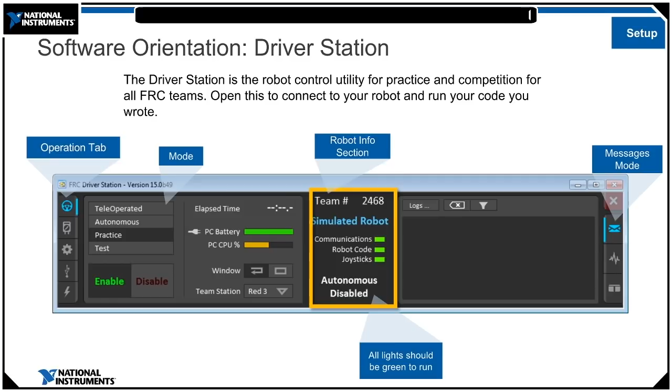All three of those lights need to be green in order to run your robot. If you're an experienced team, I'm sure you've had times when one of those lights wasn't green on the field. You know how frustrating that can be. So making sure all of that works in practice is really, really good.

On the right-hand side, you can tab to messages mode. This is where any errors or things you've programmed for your roboRIO to feed back to the driver station will show up.

Going on to the next tab is what we call our diagnostics tab. This shows what parts of the communication system are working or not working. You can see we have 5 different radio lights underneath the communications header, and each one of those lights also needs to be lit up.

You can also use this to reboot your roboRIO or restart your robot code without walking over to your robot. And here we have an example of some error messages that might come back from your robot while you're running it. So April, what do some of those error messages mean exactly? What are some common ones that somebody might see?

A really common one will say that a server's not running and that you should check your firewalls. That's how you know that your Windows firewalls are interfering with the communication for the robot. So if you're seeing something like the MDNS server can't start, go check your firewalls. That's a really common one.

Or if you're running a loop, a lot of times it'll say that something is out of memory or a loop is running too fast. And that can be an indication that you have an untimed while loop somewhere.

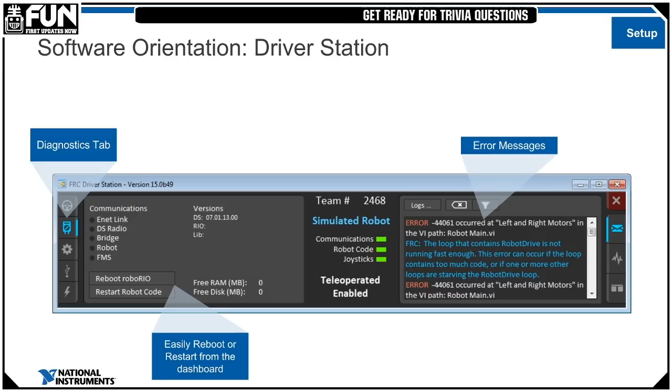Moving down one more tab on the driver station, here's the setup tab. This is where you go to type in your team number when you're trying to talk to your robot. You can also use this to configure match settings.

So if, for example, something crazy happens and we have a minute of autonomous next year, you can go set that up for a minute of autonomous here. We've configured it with default match settings, but you can change those at any time.

If you move down a tab on the right-hand side of the driver station, this is chart mode. This shows all the information we're getting back from the roboRIO by default: your battery voltage, your packet loss percentage, what percent of your CPU you're using. So if you're not getting communications, looking at the chart tab can be really helpful in figuring out why.

Going down one more tab on the driver station, we have our USB devices. This is where you can see any controllers plugged into your computer, see all of those live joystick inputs to figure out what the A button actually is. You can also combine messages in chart mode, though it can get really hard to read pretty quickly.

The very last tab on our driver station is the power and CAN tab. This is where you can go to see if your power light on your roboRIO is red. Go to this tab after plugging it into your driver station or your computer, and it'll tell you what rail on the roboRIO is shorted, which is pretty neat. You can use the user manual to determine what voltage corresponds to which rail. So for example, if it says you have a fault on your 5-volt rail, we know that's probably the DIO on the roboRIO.

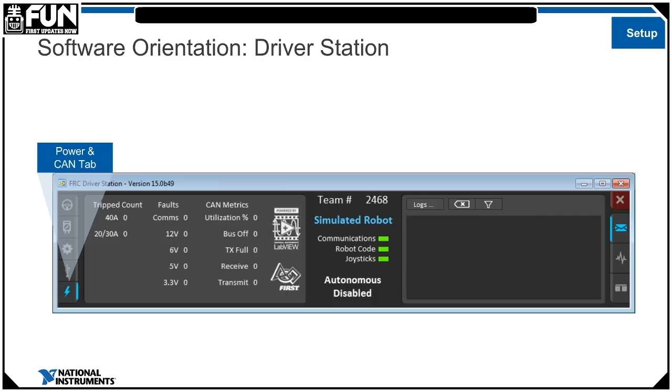April, I got to ask, there's quite a few people in chat talking about something about a 60-second autonomous listed in there. Is that a leak for the 2018 game? It was a total random number I came up with. Total random. So when it comes out this year, we're going to know how badly you lied to us. If it comes out to be 60 seconds, I think some people at FIRST would be very mad at me for ruining their surprise. I promise I'm not involved with that in any capacity.

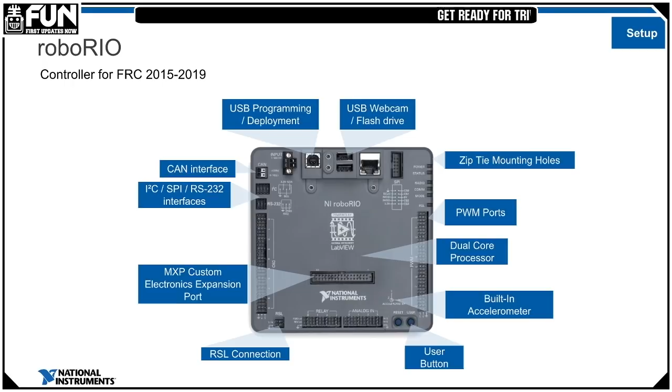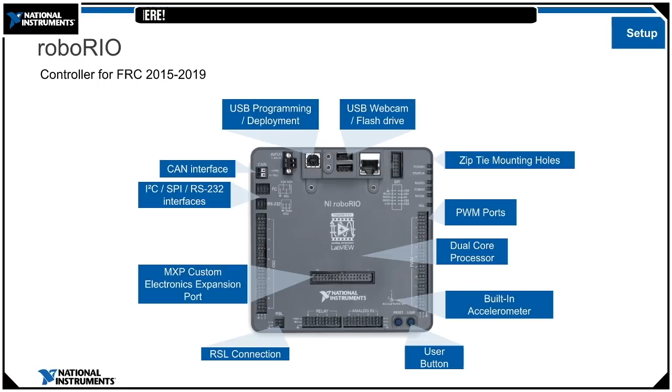Moving on from the driver station, this should be something you guys are all pretty familiar with. This is your roboRIO. We've highlighted all of the inputs and outputs we have on this thing. Typically you want to use that USB port for programming and deployment, and definitely for imaging—it's the most stable connection you can get from the roboRIO. You can use the other USB ports to connect to that all-important webcam on your robot, and the Ethernet port should be connected to your radio anytime your robot is on the field. The roboRIO actually has 4 zip tie mounting holes around the outside, so you don't need to drill into it—you can just zip tie it to whatever you want. Then we have our PWM ports, the accelerometer, our RSL port, and that MXP custom electronics expansion port in the middle. So if you want to design your own boards or work with a third-party partner board, those go there. And then all of our I2C, SPI, RS-232, and CAN interfaces.

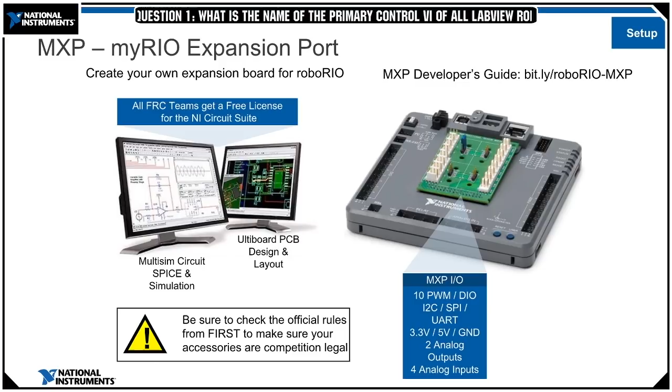Moving on, talking about that MXP, the myRIO expansion port, we actually have a developer's guide for the MXP port. So if you're really feeling it and want to design your own board, you're absolutely welcome to do that—be sure to check the official rules from FIRST to be sure that any accessories you design or use are competition legal. Looking at some of the other MXP accessories, we do provide some prototyping boards and breadboard type accessories. And some of our third-party partners, which you can get at AndyMark, do make boards that fit in the MXP slot.

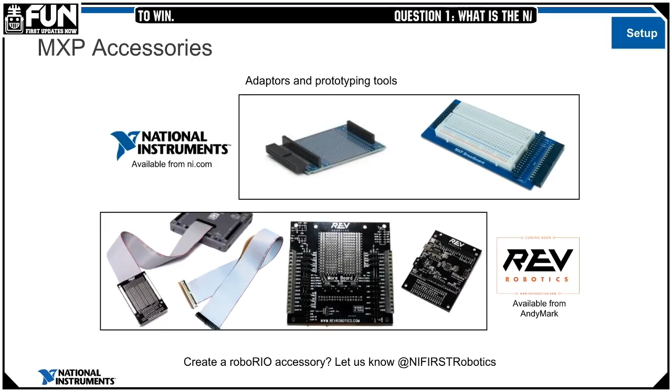So if you don't feel like designing your own board and you want to use something that is likely competition legal, go check them out.

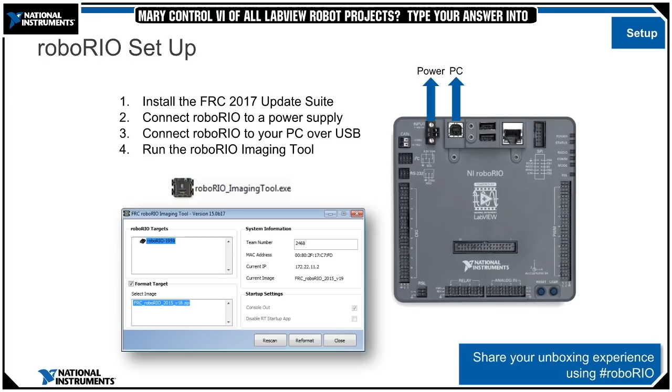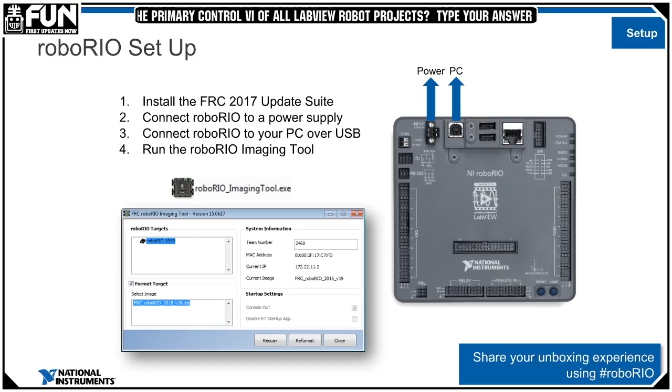Let's look at setting up our roboRIO. This is a pretty quick and easy 4-step process to get it ready to run LabVIEW code. First, install the update suite to get the most up-to-date image. Connect your roboRIO to a power supply—they are not USB powered, so they need that external 12-volt supply. Connect your roboRIO to your PC over USB, then open and run the roboRIO imaging tool. Make sure you put the team number you want to use in there, because that needs to correspond with whatever team number you give the driver station, since that's how they talk to each other.

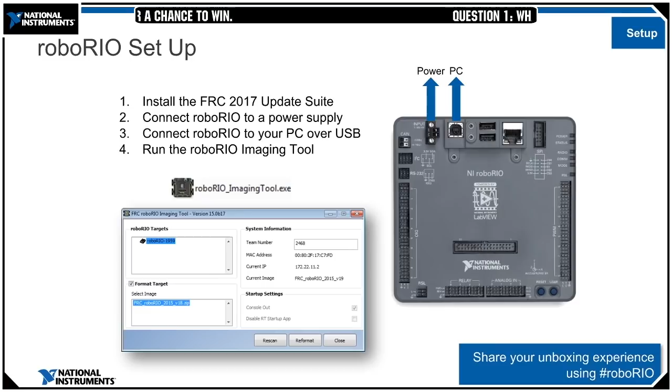So let's look at how we go from opening LabVIEW to driving a robot in 5 quick and easy steps. Step 1: you should be able to do this in simulation if you're following along, but if you're using real hardware, you need to properly set up the roboRIO controller and all your other electronics on your robot first. So step 1 is open LabVIEW. Then from that Getting Started window, you can either go to New and FRC roboRIO project, or just click on the FRC roboRIO project link on the front page. This opens your default roboRIO project.

So April, something really important in any file structuring program is coming up with a really good way to save files and file numbering and naming. Do you have any suggestions for making it easy to keep track of what you're on? Yeah, I highly recommend giving it a descriptive name. So if you know you want to use this project to develop, say, encoders on your robot, call it robot encoders or 2017 robot encoders. Then as you save it, you can add more details or put notes right in your VI. You can double click anywhere in any VI in LabVIEW and it'll make a note for you. So you can put a lot of notes saying, hey, this is what I'm doing in this VI. That's a great way to provide information without cluttering up your file names.

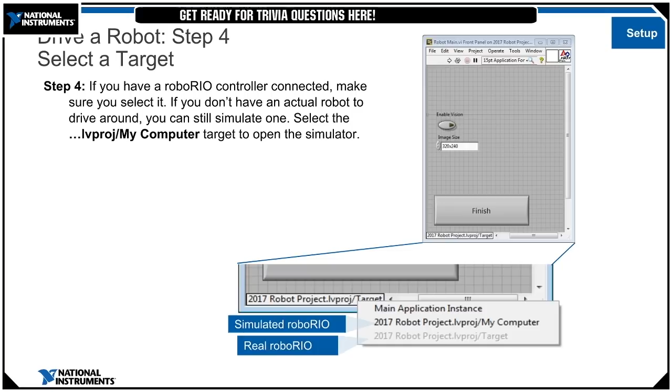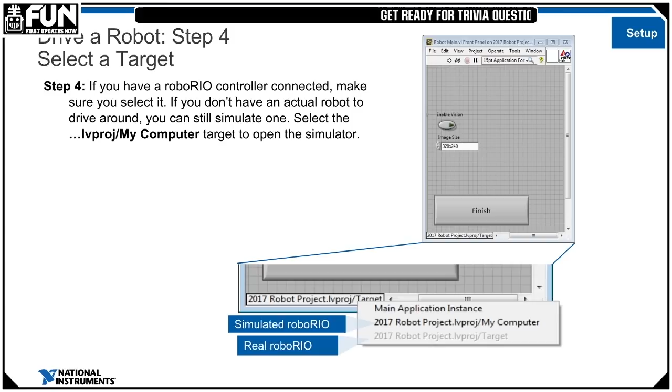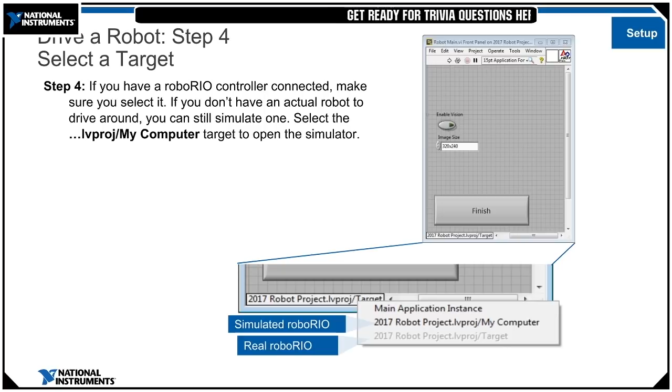So once we've opened up Robot Main, we can go ahead and select our target, which is step 4 of this process. When you're looking at Robot Main, you'll see that little yellow text box in the lower left-hand corner of the screen—that's actually the target we're going to deploy this to. By default, it's going to be looking for a roboRIO to deploy to. We can click on that and change the target to point at your computer. When you point it back at your computer, it'll automatically open up our robot simulation window and go through a little opening process to open up all the supporting files, but you'll be able to test any drive code in simulation without needing an actual robot.

Once you've toggled that over to a simulated roboRIO, which I'm doing in my case because I don't have a robot at my desk, we can move on to step 5, which is to click that white run arrow at the top left-hand corner of Robot Main. This is actually what's going to send your code to the roboRIO or your simulation, and at that point you should be able to drive your robot given that everything else is hooked up correctly.

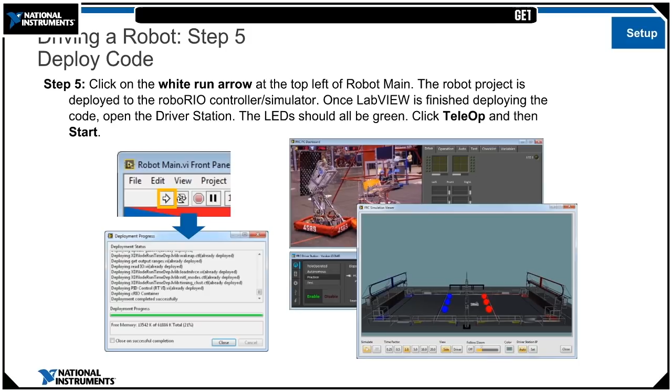Cool, so let's move on to actually looking at LabVIEW. We're going to briefly talk about what LabVIEW is, look at the development environment, go over some programming fundamentals, and then some things that can help you with troubleshooting your robot code.

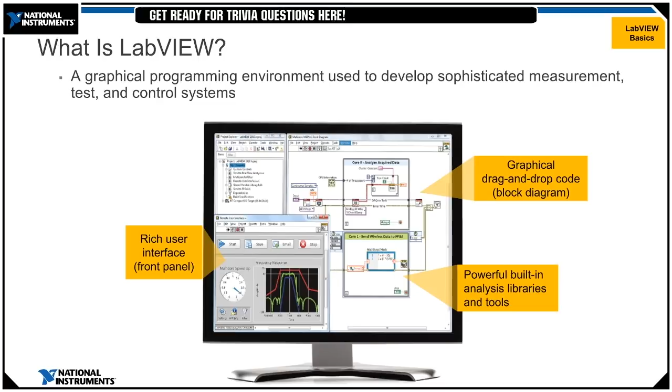So what is LabVIEW? I keep saying this. LabVIEW is a graphical programming environment. It's not actually a programming language — the language it's written in is G, and LabVIEW is just a programming environment, just like Eclipse or anything like that. We use it to develop sophisticated measurement, test, and control systems. So we have this graphical drag and drop code style that's a lot easier for most engineers to pick up than traditional text-based languages.

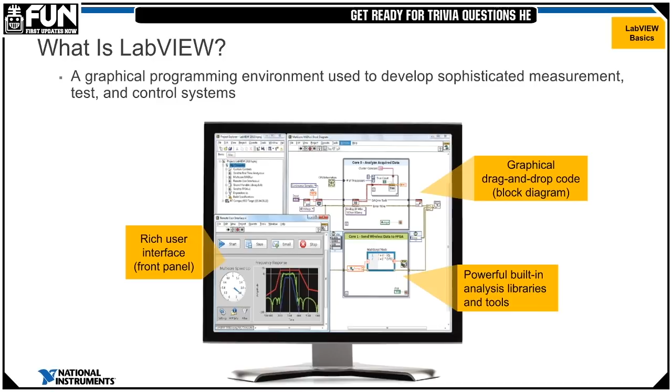Really what we care about in FIRST is that supercritical Teleop and autonomous code. When we look at our Teleop code, it sort of lives in 3 places. We're going to want to initialize in the begin VI — this is where we set up our joysticks, our motors, anything we want to refer to later, and we set up their references in begin. We then use those references in Teleop to actually access those devices, and then we close those references out in finish to release them to be used by the next program.

When you're modifying that FRC robot project template, do not modify robot main. You don't really need to, and putting stuff there can really slow down that main communication loop that we definitely want to keep as fast as possible.

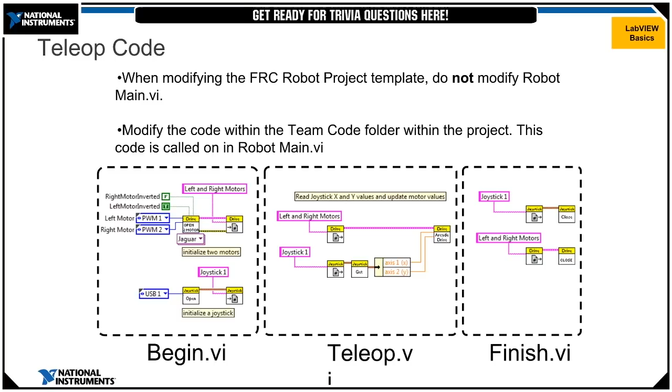So looking at our robot main.vi, because you definitely want to have an understanding of how this works — in our main Project Explorer, again, we have that Project Explorer window, which lists all your files. We have our front panel here, which is going to be the window with the gray grid on it by default. You can toggle the grid off if you don't like it; I like it because it helps me tell the 2 windows apart. This is going to be kind of your user interface — this is where you're going to have any buttons, any inputs, things like that living on the front panel.

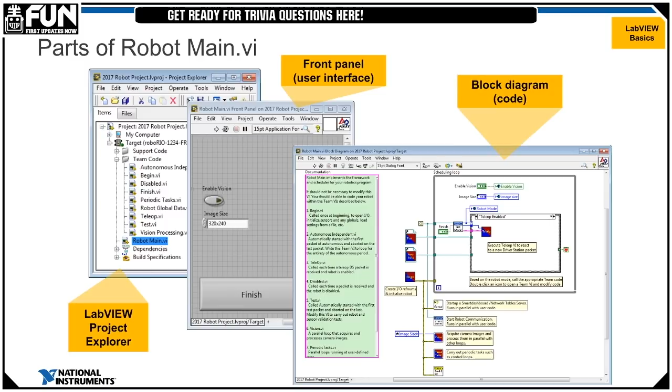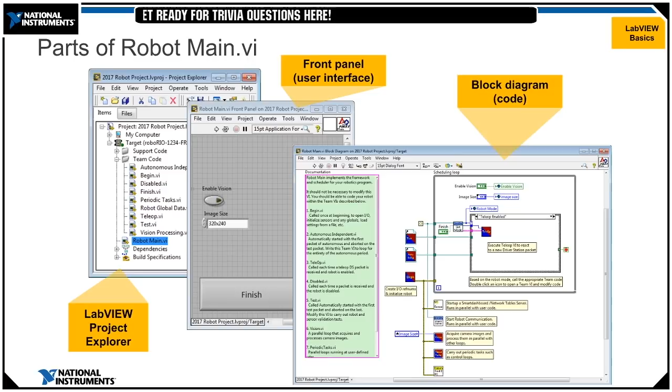And then the window with the white background, you can open this up by pressing that Control-E shortcut — we're going to view block diagram. This is where your actual code lives. This is where you can see, oh, I have some loops here, I have some sub-VIs, I have some notes — this is where things are actually happening. You can kind of think of LabVIEW as an old analog radio: you have some buttons, some dials, some screens on the front panel, and then all your wiring is actually going to be on your block diagram.

Looking at that LabVIEW Project Explorer window, we have a couple of standard LabVIEW file extensions. Your project files are going to have a .lvproj extension. This is going to own all of your VIs, but the neat thing is that a VI can be owned by multiple projects. So a VI is a virtual instrument - it's what we call that combination of a front panel and a block diagram, so it can be called by multiple projects at the same time, which is pretty cool.

You can also make custom controls. So if you want a really specific dial or something like that, you can develop that and then use it, and it's going to have a .ctl extension.

The other cool thing about the Project Explorer window is you can actually test your connection to a roboRIO right from this window. You'll see where it says target, and it should say roboRIO-your team number-frc.local. In this case, we're team 1234, because that's very original - the most creative team name ever. I'm running out of numbers. I used to use 9999, but we're getting up there in FRC teams, and that's going to be someone's team number soon. You can right-click on that target and select Connect to Target.

If it connects successfully, it'll say Connection Established, and that little button next to the roboRIO will turn bright green. So it's a really quick and easy way to test that you have a connection before you start trying to deploy code.

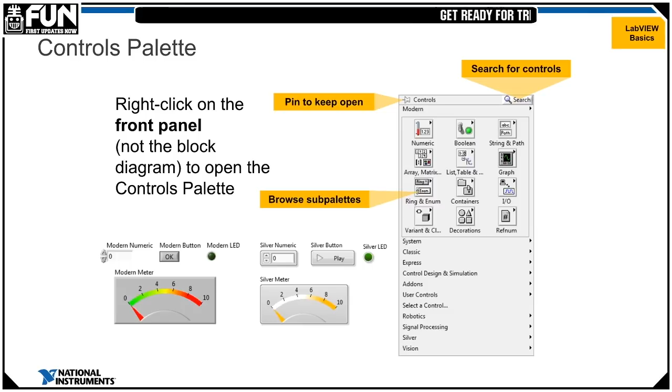Hey April, I wanted to ask - we have a few questions coming up, but there's one that was specific to a slide you were just on. Rich4327 asked, what is the advantage of the front panel for those in FRC? Like, what advantage can they get out of using that?

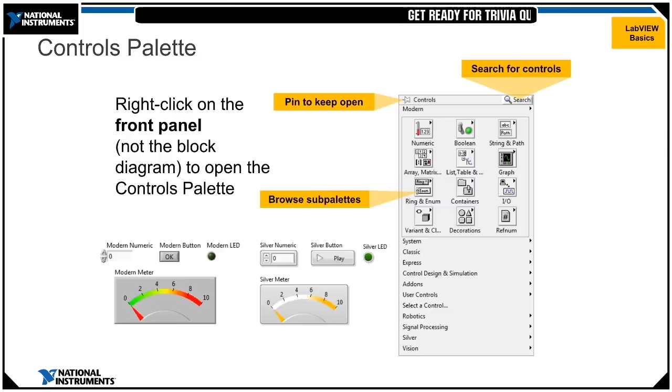Front panels are great, like I said, for that live testing. I can be connected to my robot over Wi-Fi in my shop, driving it around, and I could be returning the image I'm getting from the camera. And if I'm doing any sort of vision analysis on that, I could see how many rectangles I'm creating, for example, or what values it thinks are coming back from the camera, if it's identifying something as light or dark. And I can see that all in real time, but I can also adjust that in real time.

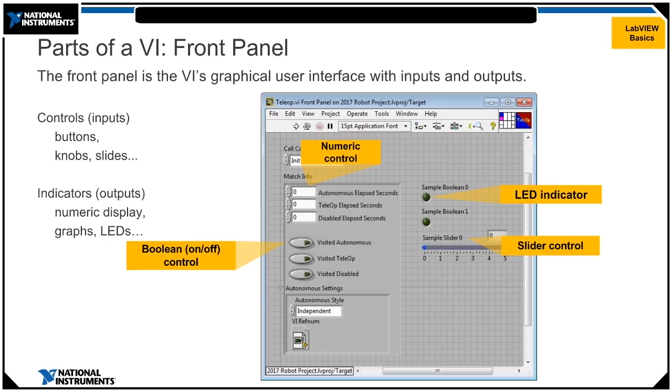So I can set up some controls that correspond to what my light threshold should be, if we're continuing with that vision example. And if I say, oh, okay, 5 is too low, let me bump it to 7. Oh, that's too high, let me bring it down to 6. I can do all of that really, really quick. So it really speeds up any sort of code iteration once you have the basic structure in place.

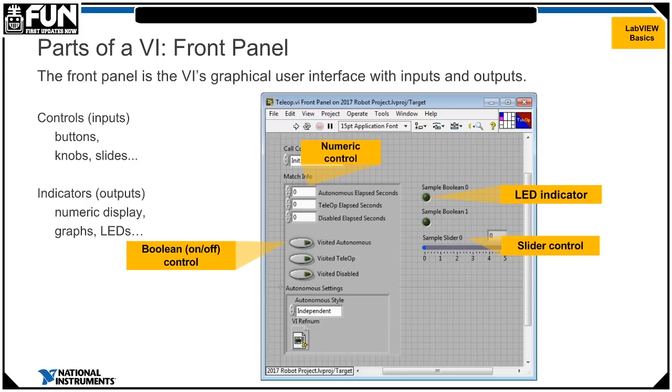So let's move on to parts of the VI, looking at the block diagram. Like I said before, the block diagram is the code for LabVIEW. That's where your actual code lives. Those graphical blocks are connected with wires to control execution, and those wires help enforce data flow, which we'll talk more about in a bit.

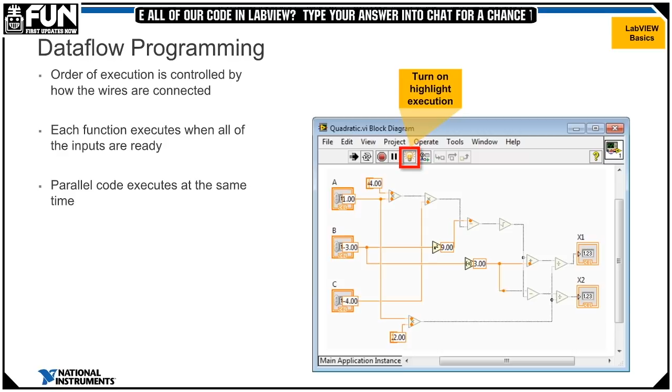If we look at this example here, you can see that the multiplier by 2 on the very bottom of this window wouldn't execute until it got the value down from A. A really good way to find out what order things execute in is to click on this little light bulb and turn on what we call highlight execution. It will slow down all of your code so you can see things happen in real time - those little dots, which kind of look like Pac-Man to me, will run along the wires as things happen, so you can see what order your code executes in.

It's a really good way to make sure your code is executing in the order you think it is, you're transitioning between states in a state machine correctly, your logic is right, things like that. But one thing to keep in mind with highlight execution is it slows everything down. So if you're running robot code on your roboRIO and you turn on highlight execution, you're immediately going to get an error that says your main control loop is running too slow and we can't maintain communication. So this is mostly used when you're developing code to test logic, test execution, and order of operations, but you don't really want to use it on your robot.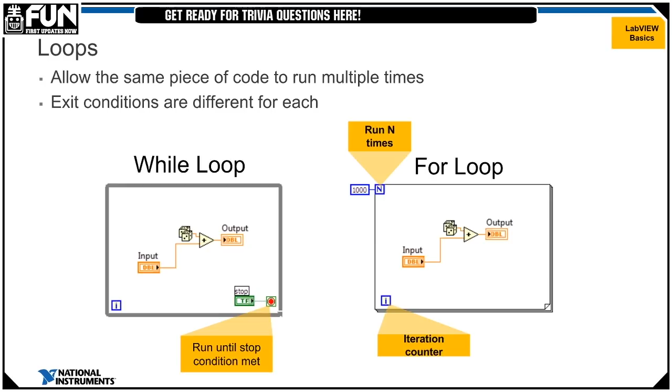A for loop, on the other hand, runs a set number of times. You can wire an integer to what we call the N terminal, and it will run that number of times—in this case, we wired 1,000, so this for loop would execute 1,000 times. You can also use the iteration counter, that little 'i' square in the lower left-hand corner, to use the number of times it's run in some logic to only execute it so many times. So you can say, hey, if this value is greater than 15, stop my loop. That's a neat way to do some logic in there as well.

So I talked briefly about sub-VIs earlier. Sub-VIs are going to appear as those little squares on your LabVIEW block diagram. These are basically functions, and they're just going to have more code inside of them. In this case—and this is the example we'll be walking through here in a little bit—we decided...

We wanted to scale our joysticks down when we get the input, because 0 to 1 was way too much on our wheels, for example, and we were browning out, so we wanted to scale it down by 2% or whatever. So we made this compact little sub-VI. Sub-VIs help keep your code really neat and clean, and can help it stay very readable even if you have a lot of complicated logic going on. The neat thing about sub-VIs is they have a connector pane, so you can pick and choose where you want to wire inputs and get outputs from your sub-VI.

And we'll look more at that when we do our live example, which I think we'll jump into now, Tyler.

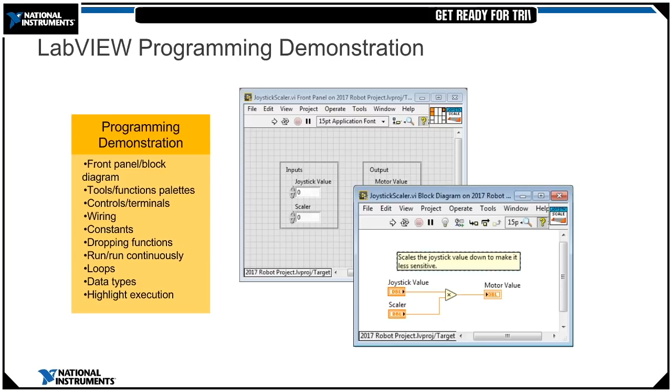Alrighty, so we can jump into a live example here that you're going to be showing. What are you going to be showing in particular? We are actually going to go ahead and make this joystick scaler sub-VI and show you how you make a sub-VI, and then how you just write some simple code in LabVIEW as well. All right, we are good to go. All right, awesome. So you guys should be able to see my LabVIEW project here.

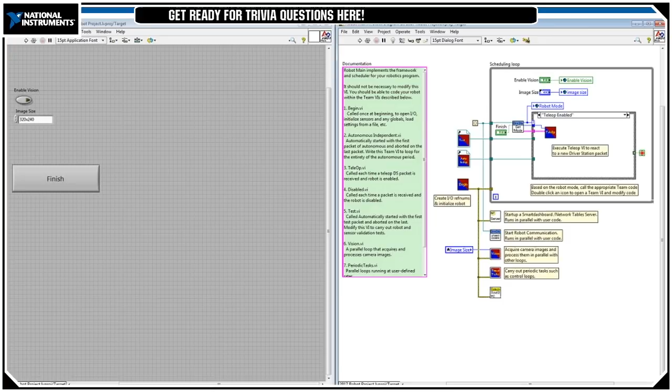I just have a default robot project. Note mine is still called 2017 Robot Project. That's how you know it's not important. But we're looking at robot main.

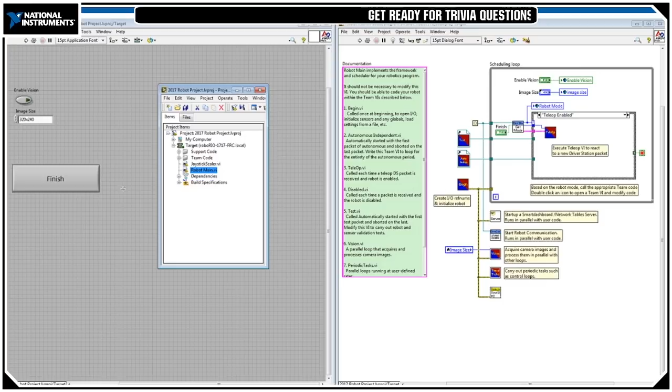So over here we have our front panel. Over here we have our block diagram. Now I want to go and scale my joysticks, right?

So we're getting that information in our Teleop sub-VI, which is right here on the screen. In order to open up the sub-VI, I'm going to double click on it, and it's going to open up over here. You see that we have another front panel, and then I can either press Control E, which is the shortcut, or navigate to View. Should be under View.

Shows you how often I use it. Maybe it's under Window. There you go. Window Show Block Diagram. I pretty much exclusively use the shortcut.

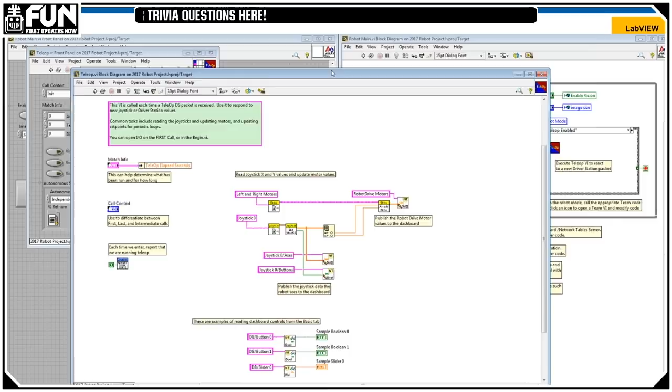And this is the block diagram that I have for Teleop. So over here, you can see that we're getting our refnum for our joystick, we're getting the values, reading these off the array, and publishing this to the arcade drive, which then gets sent to our motors.

So this value right here is coming directly off the joystick and going to our motor. This can be really problematic sometimes because if you ramp your motors up too quickly, you can cause brownouts by pulling too much amperage out of your battery. And this can actually cause your robot to lose connection and need to restart in the middle of a match, which is super inconvenient. So in order to avoid this, we're going to scale our joystick down a little.

So I want to go make a new sub-VI. I'm just going to go to File, New VI, and we'll make these windows big. Cool. So I have a blank front panel and a blank block diagram.

I know that I want to have two inputs, right? I want to get the initial value from my joystick. So we'll go ahead and just make a numeric control for that, and we'll call this joystick value. You can see that the name updated on the front panel and on the block diagram.

And then I also want an input for how much I'm going to scale it by, right? So again, I'll right click on my front panel, click here, go to numeric control, and get another one, and we'll call this our scalar. So you can see we have two things here.

Now if I want to be a good programmer and put notes in my code, I can just double click and say, hey, these are the inputs. So now if anyone else opens this up, they know that these are values we're expected to provide.

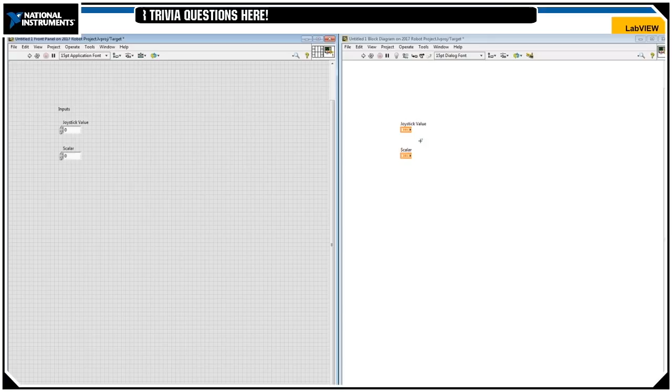So great. So now I just want to scale it, right? All I want to do is multiply our joystick value by our scalar. So I can right click over here, navigate to numeric, and then select multiply.

If I didn't know where that was, I can also right click, click on search, and then type in I want to multiply something. And it'll say, oh look, right here, multiply. And I can just double click on this, and it shows me where it is in the palette so that I can find it next time.

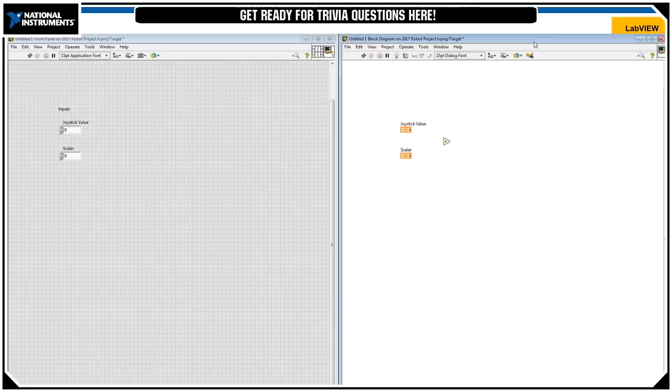So I'll click and drag and drop that over here. I don't need my functions palette anymore, so I'll close that out. In order to send these values to our multiplication, I'm just going to click on the wire terminal on my scalar, and then click on the input terminal over here.

You'll see LabVIEW does some sort of automatic routing of your wires, so they're not just squiggly and all over the place. But if I wanted to clean that up, I can click on this cleanup button, and you can see that it does an alright job. I don't really like it, so I'm gonna undo that and put it back to the way I had it.

I'm just going to bring that in because you want your code to stay sort of small and readable. Typically, we program from left to right in LabVIEW, so you can sort of scroll across and read it. You can go top to bottom, you can go right to left. Probably safe to stick with left to right.

And so now I want to get this value out of my multiplication. I can either make an indicator over here and wire it up, or I can actually just right-click on this wire terminal and go to Create Indicator. Boom, it's right there. And then I can go ahead and say this is the value we actually want to send to the joystick, so we'll call this final joystick value.

You can see LabVIEW stuck it up here. I'm going to bring it down, put it by my other ones, and then April asked if there's a way we can zoom in just a little bit on this.

No, you cannot zoom in LabVIEW, actually.

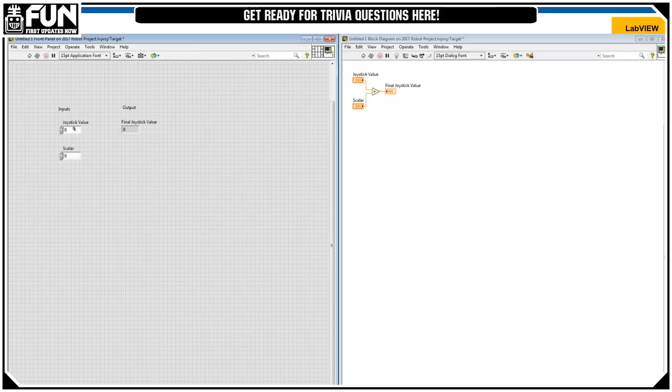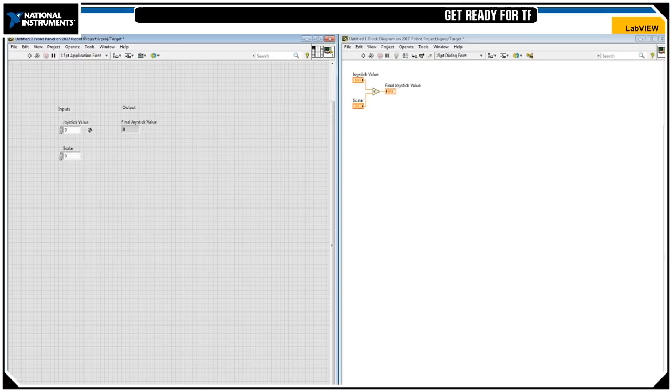So now we've set this up, and this is our sub-VI. We're going to want to connect our inputs to our connector pane so we can access them in our other block diagram in Teleop. I'm just going to select the input, click on the little tiny terminal block up here, and then click on that—you can see this turns orange. Then I'll wire this one a couple spots below it to my scalar, and wire that to my joystick value.

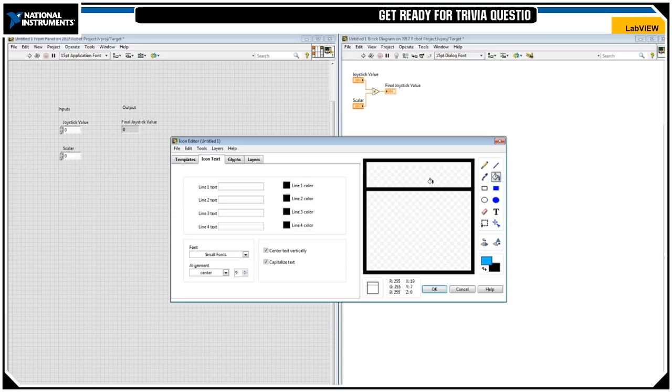The other fun thing about making sub-VIs is you get to make custom icons. So I can click on this, it'll open up the icon editor. I can clear this and just make my own icon. We'll make this blue—I like this color blue—and then we'll put some stuff on it.

We probably want to give this a descriptive name so I know what it is. So we're gonna—oops, I don't want that to be blue, make that black. Probably want to give this a descriptive name so I know what this sub-VI does. Otherwise you'll end up with a lot of sub-VIs that look exactly the same, and your code will be impossible to read, and no one but you will know what's going on.

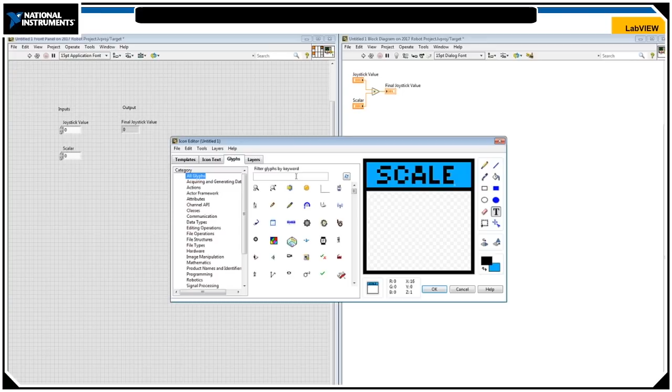And then we have a whole lot of these fun little glyphs, so I'm just going to search scale. What are some of these that look interesting? This looks like kind of what I want to do here—I'm taking a value and making it something else. So when I'm happy with my icon, I can click OK.

And then I definitely want to save my sub-VI before I lose it, so I'll go to File, Save As. It's just going to put this in this temporary folder here that I've created, and we'll call this Scale Joystick Value.

Great, so now we've got this, and now we want to go back to our Teleop VI. We'll make that big, so now we can see our Teleop VI, and I want to put that other VI on here now. If we go to our project window, you'll see it automatically added my VI here because I made that new VI while I had this project open. Otherwise, you could right-click and browse, and add VIs, files, things like that.

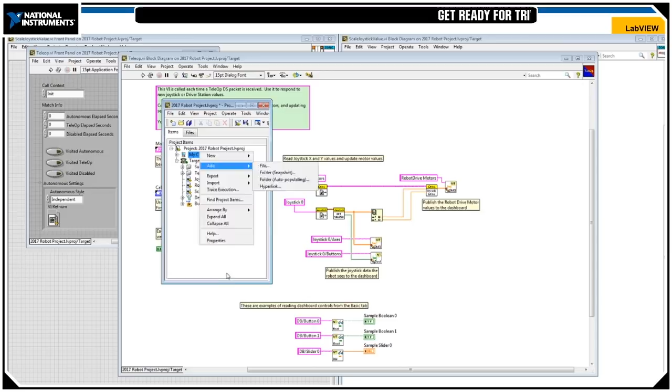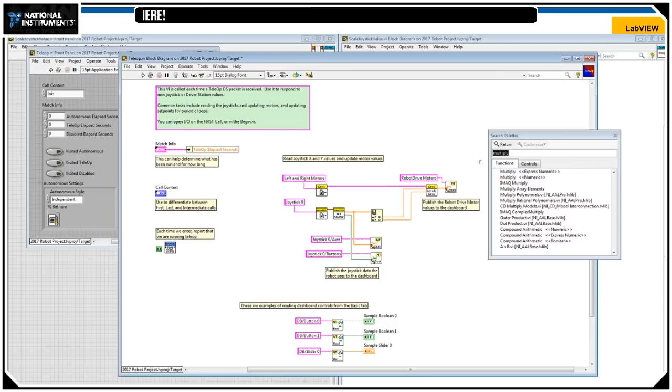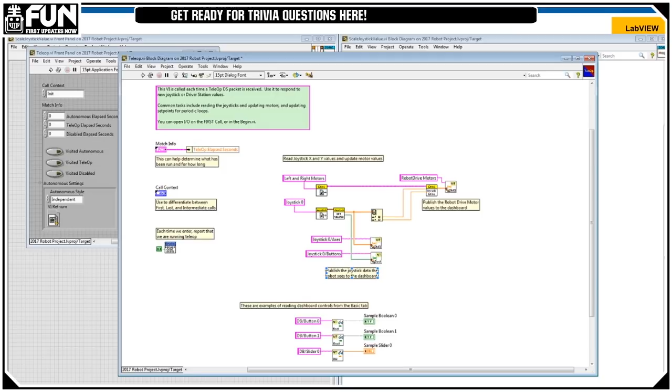So if I want to get to this VI, I can either click and drag here and it'll pop over. I can also now search for—oops, what did I call that? Scale joystick value. Can't type it right, but you can also search for it and find it that way. I usually grab them from the Project Explorer because then I know I'm getting the VI I want. So I'll put that over here.

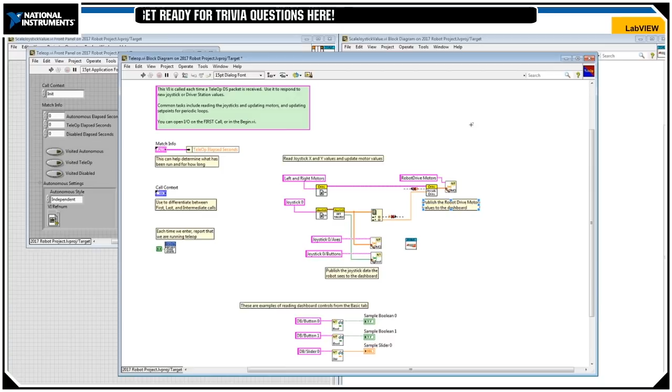I'm going to go ahead and delete this wire. So you can see I have these broken wires here—that's just because that end's not connected to anything. You can clean up broken wires with Control B. So once those are cleaned up, I'll drop that in here.

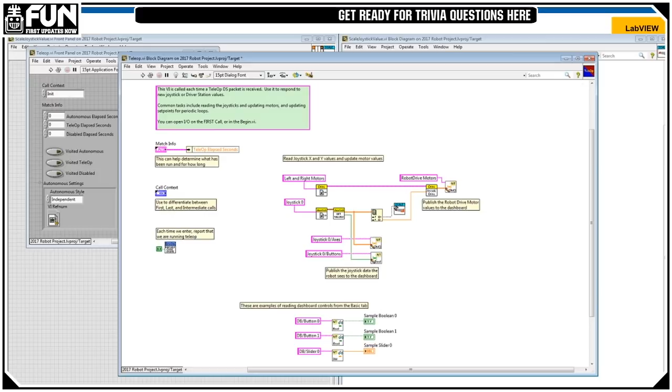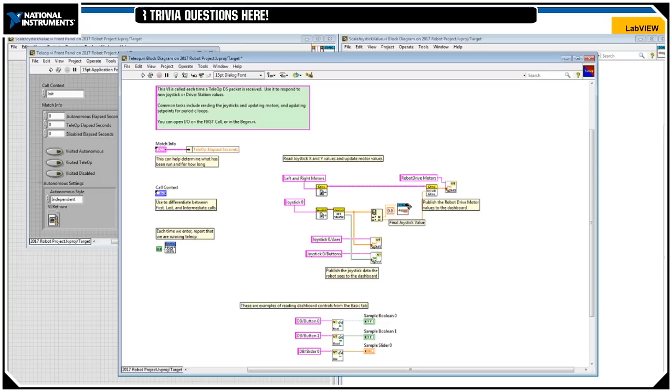This is going to go—you can see if I hover over these terminals, it tells me what I'm connecting it to, so I know, say, that's my joystick value. Then I can clean up the code a little: right-click here and go Create Constant, and we'll give this a multiplier of 0.8, so we turn it down just a little bit, but we're not taking away all of the power. Then we'll wire that final joystick value back to our x-axis. And now we're done—we've scaled our joysticks, we can save our project, and we're good to go.

And that's the end of our live demo. All right, we'll jump back into the other one.

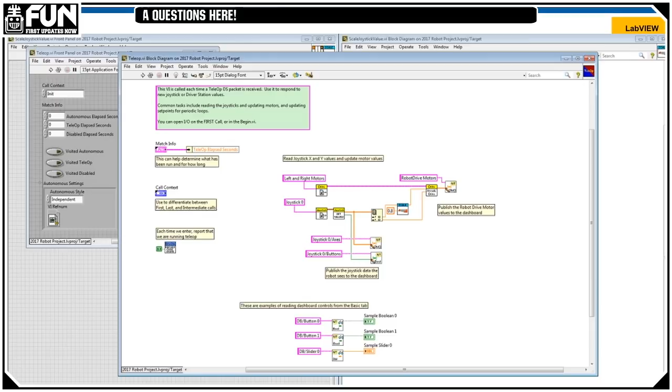I think it's probably a good time to start our third trivia question. What do you think, April? Sure, I think now is a great time. All right, go ahead, what is it?

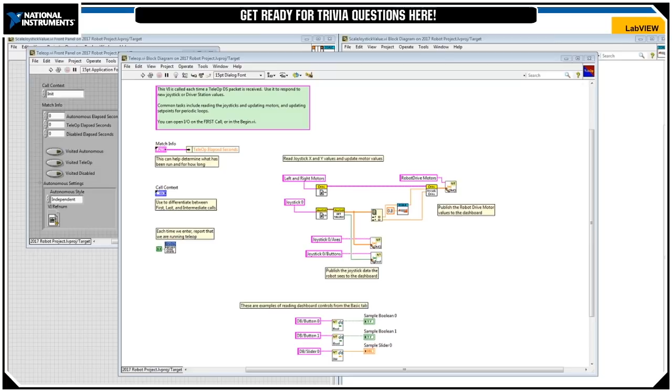All right, our third trivia question is: what element in LabVIEW do we use to show data from a VI? Just a reminder, you have to follow or sub to be in. Go ahead and start typing your answer into the chat, and we'll have Nightbot roll for that in a bit. This is a one-word answer.

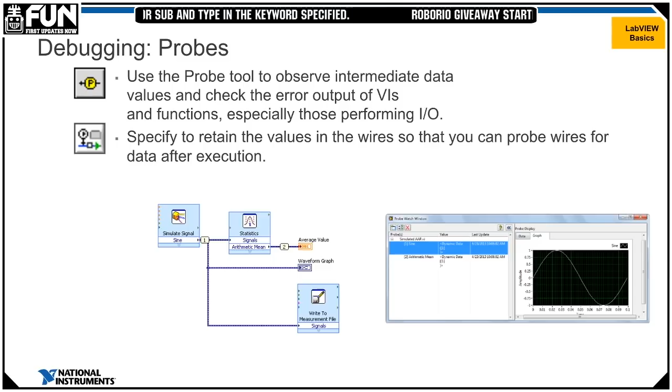The other neat thing about probes is we have this little button that's the retain value or retain wire values button. It's not the yellow one, it's the gray one on the bottom there. And that actually toggles all of your wires to preserve their last value so you can probe them after you've run your code. Really, really useful in debugging. Make sure you turn it off before you build your executable and deploy it to your roboRIO, because it does take up a lot more memory.